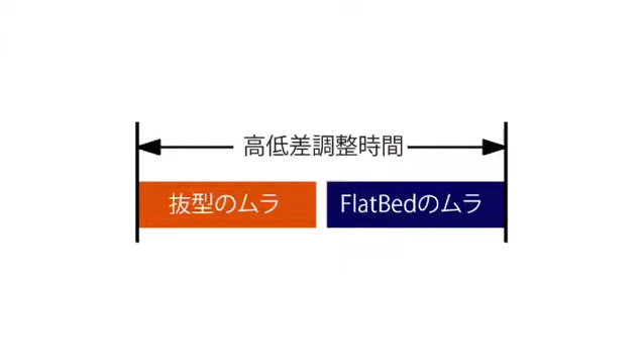When do you need to compensate for unevenness? There are two sources of unevenness: the die and the machine. Our research found that the majority of adjustment prep time was wasted on unsuccessful compensation for the unevenness of the cutting machine's flatbed. Reducing this setup time would lead to a significant increase in factory floor productivity, while driving down costs for any die cutting operation.

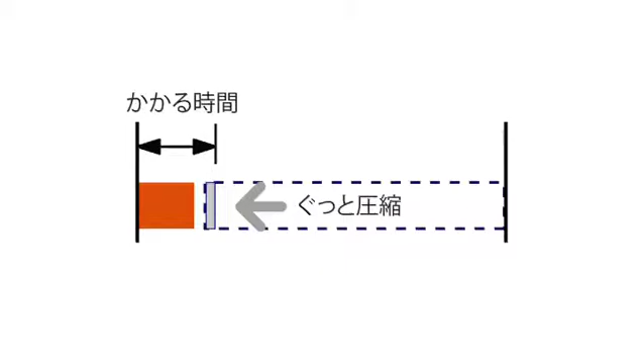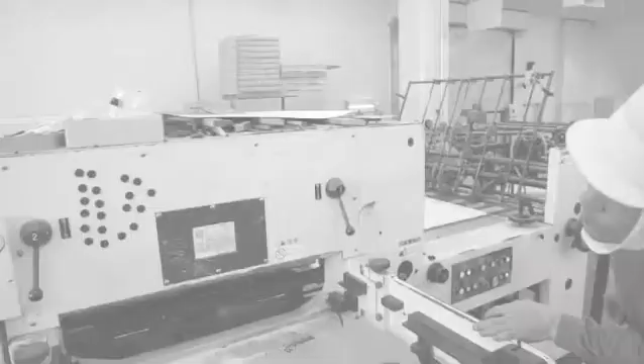Don't you agree? For example, suppose the average adjustment prep time for a new die took 30 minutes. If you use 10 new dies a month with your cutter, that's 300 minutes, or 5 hours spent making adjustments each month. If each hour of that time could be spent doing 5,000 die cuts at 5 yen apiece, that's a potential 125,000 yen lost each month.

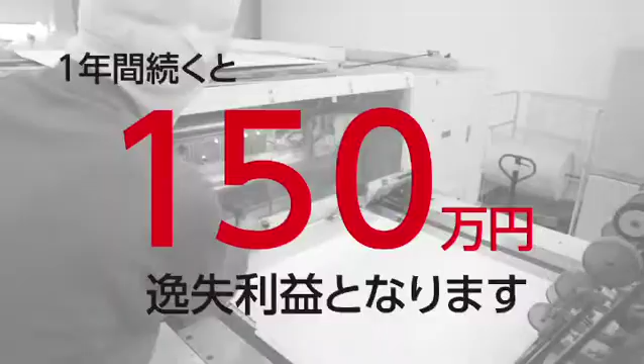Over the course of a year, that's 1.5 million yen's worth of potential production lost. With our Pressbalance technology, this prep time is cut by two-thirds, letting you get back a million yen's worth of lost product time each year. And that's just for a single machine. If you have multiple die cutters, your savings could be even greater.

Have you ever stopped to think about just how much potential production time you've lost over the years? Our Pressbalance technology will help you change that.

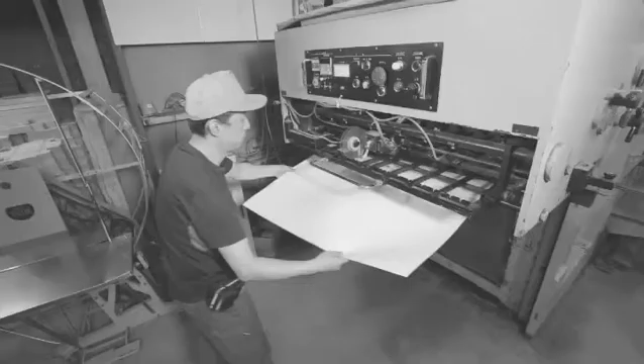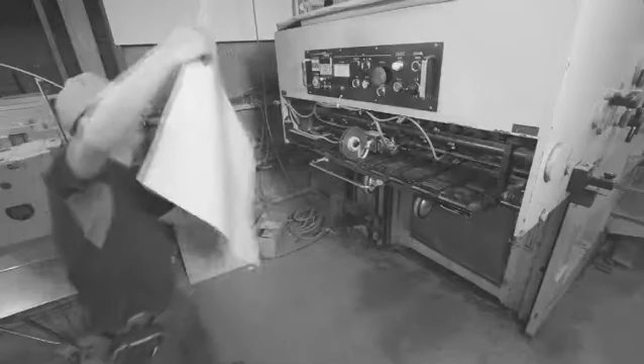First of all, we asked ourselves, why are die cutter uneven pressure adjustments necessary in the first place? Of course, if you run a die cutting press for a long time, various things will cause the flatbed to develop surface unevenness. And nothing is more difficult than accurately making the precise micro-adjustments needed to make the flatbed surface perfectly even. We had a theory that uneven cutting pressure isn't caused by unevenness in the dies themselves, but because the flatbed surface itself has bumps and dips rather than being totally flat.

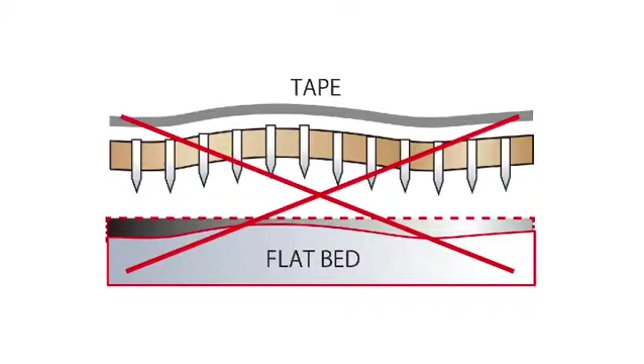And of course, if you adjust the height of the flatbed, then each cutting die's adjustment has to be done again. It became clear to us that this was a huge source of production inefficiency. There must be a solution, we thought. There must be some way to stop this problem at its source.

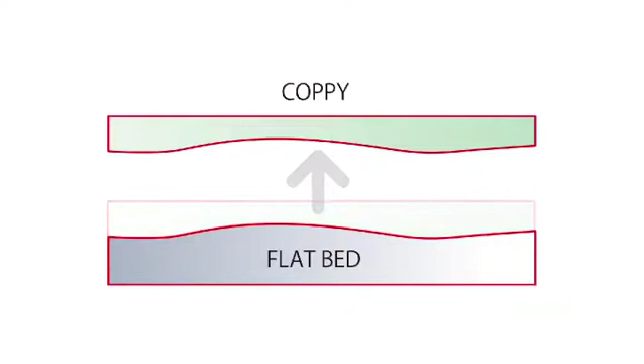And the idea we came up with was simple: we would trace the uneven cutting pressure. If we could just trace the unevenness of the cutting die pressure onto something else, and then invert that, maybe it could cancel out the unevenness. It was the moment we had this realization that our Pressbalance sheet was born.

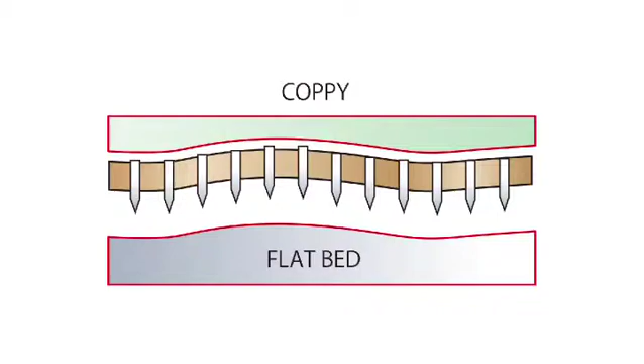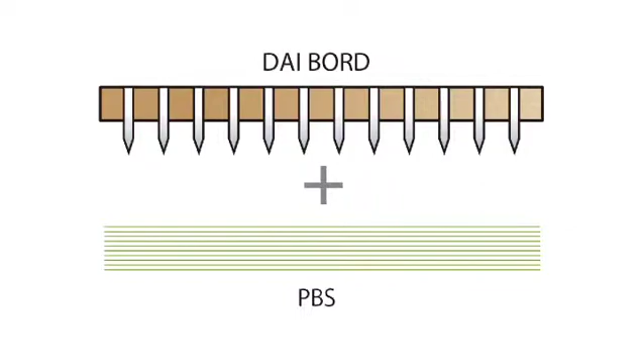We tried every possible way to trace the uneven pressure in order to get it right. Our breakthrough came when we used 10 thin layers of film with a specialized cutting die, allowing us to precisely trace the uneven pressure. People used to think pressure adjustments required precise microscopic measurements of the flatbed height. But with our Pressbalance technology, there's absolutely no need for any of that, and no need for a specialist.

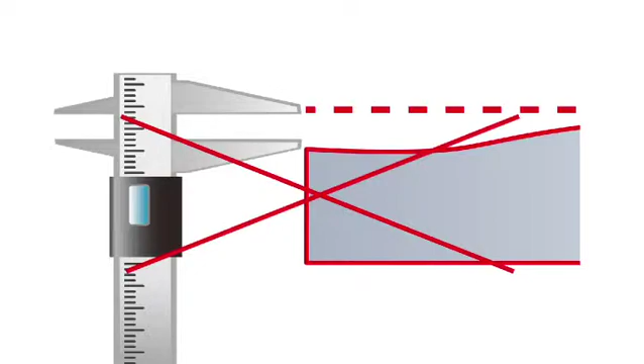Anyone can do it. Here's how our Pressbalance sheet works. Put our Pressbalance sheet setup die into your die cutter, then place the layered Pressbalance sheet film on top of the flatbed. The layered film consists of 10 to 20 micron layers totaling 0.2 millimeters thick.

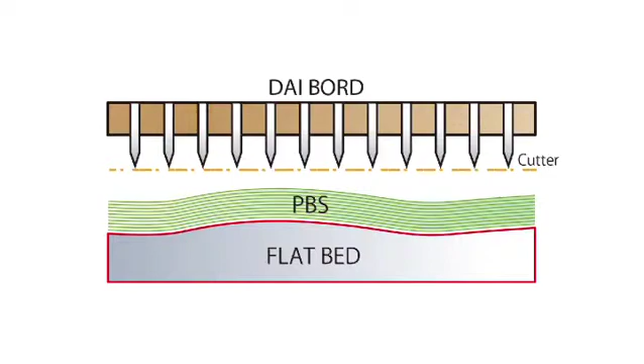The layers are held together with a gentle adhesive. This 20 micron film is made from the world's toughest resin, developed by the Japanese resin maker Toray and used in aircraft bodies. Half cut the layered film.

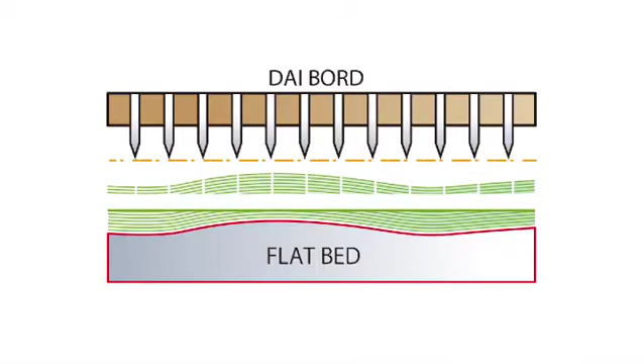Adjust the stroke of your die press cutter to cut partway through the layered film. The raised areas on your flatbed will have more layers cut, and the lower areas will have fewer layers cut. Remove the cut film. After that, the cut film can be removed at 50 millimeters pitch. The uncut film can't be removed.

The Pressbalance sheet is complete. Now, with your Pressbalance sheet, you don't have to measure the height of your flatbed to get incredibly precise evenness across your flatbed. To increase durability for everyday use, cover both sides with the protective sheets.

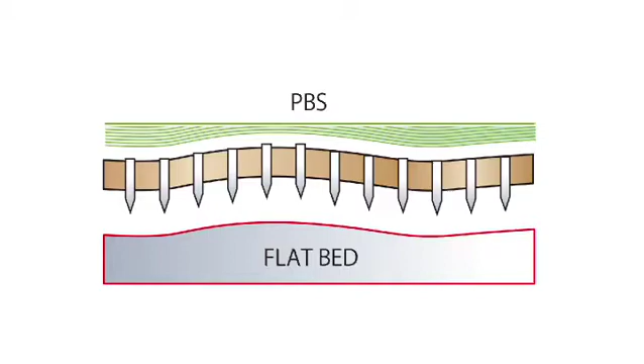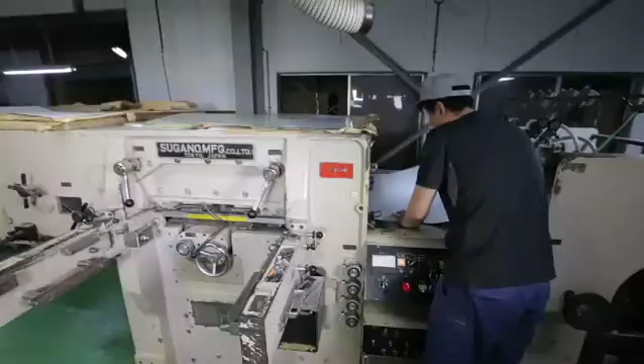How to use your Pressbalance sheet: place your Pressbalance sheet inside its protective sheets on the back of the cutting die, then the die, and apply pressure adjustment tape as usual. The unevenness from the machine itself is gone, so all you need to adjust is the die itself. The Pressbalance sheet can be left inside your die cutting machine.

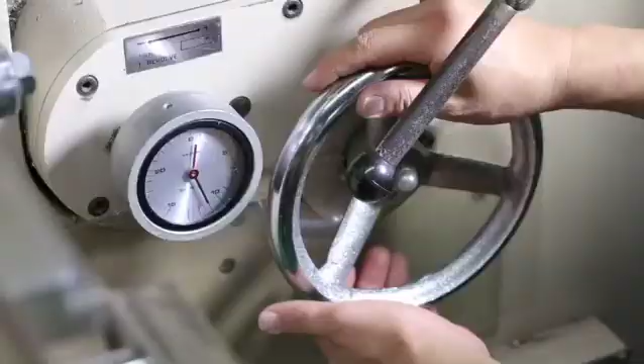If you want to use your old adjustments for your dies, just take the Pressbalance sheet out while you use them. So what do you think? With our Pressbalance technology, the more cutting dies you have, the more prep time you'll save. Think of all the extra time you could be spending on your real work and all the lost production time you could have back.

The internationally patented technology behind our Pressbalance sheet is being used for cutting dies throughout North America, Germany, and the rest of Europe, and all throughout Asia. The Pressbalance sheet is helping increase production and reduce stress worldwide. At Counterplate Japan, our dream is to help make things better for everyone.